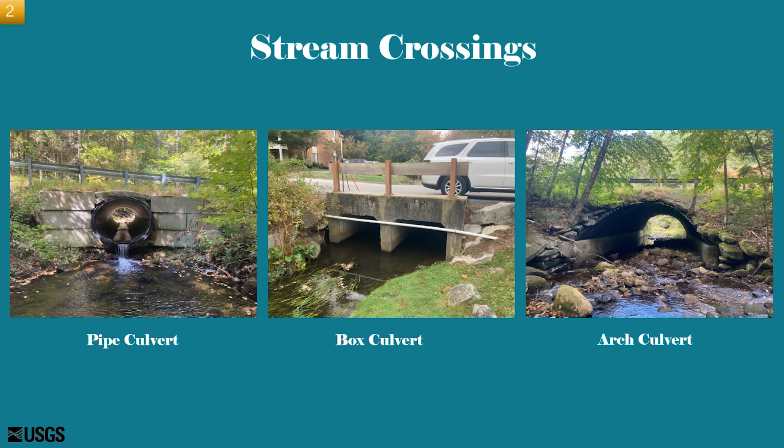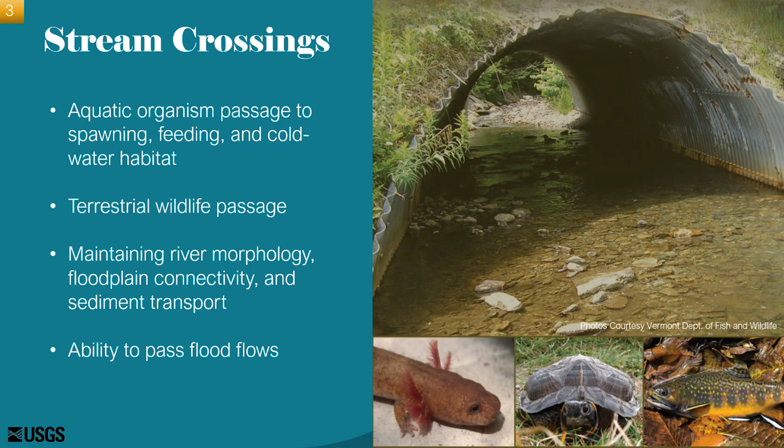So Massachusetts, as well as other states, are developing standards for stream crossings because they're essential for maintaining aquatic connectivity for vulnerable species of fish and terrestrial wildlife, and maintaining the natural water course and stream bed, and designing structures that meet minimum hydraulic standards that have more capacity to pass normal flow and flood flow conditions are essential for flood resiliency. There is also consideration to account for future flood flow conditions due to climate change as well.

So a little bit of background here. There are a lot of stream crossings in Massachusetts, as you can imagine, in most states. But in Massachusetts, there's over 25,000 stream crossings, and many do not pass the 10% annual exceedance probability flood flow, or the 10-year recurrence interval flood flow. And many don't pass standards for aquatic organism passages.

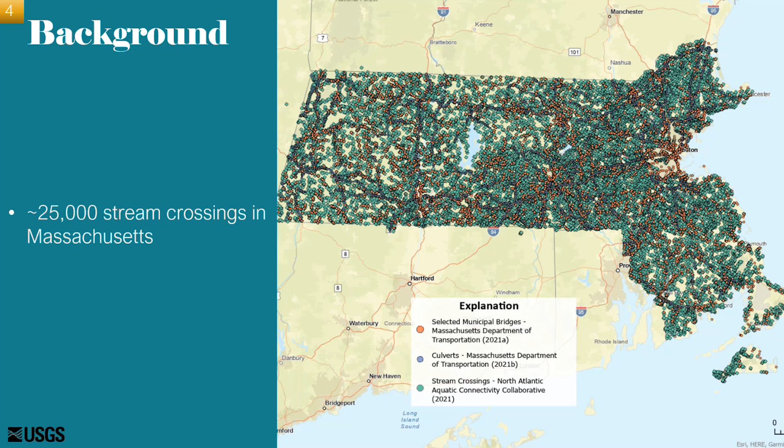So the state agencies and municipalities are looking for a tool to help standardize and prioritize a more comprehensive planning process for culvert replacement projects to increase flood resiliency and aquatic organism passages by adhering to these state regulations throughout the state.

So, as was said, many of these culverts are undersized, which often results in stream bed scour that can significantly lower the stream bed downstream of the culvert, creating a drop or a perch from the culvert outlet to the water below. And native fish can only jump about 1 foot or so. So culverts that are perched more than 1 foot become barriers to these fish migrating upstream.

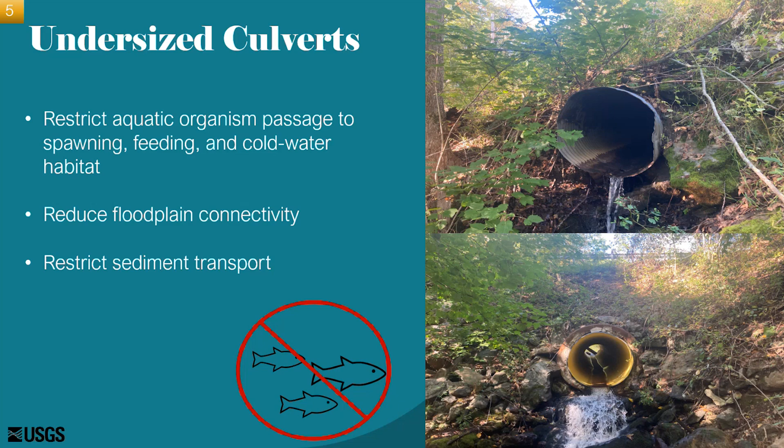These problems are becoming more and more prevalent due to heavier rainfall events, as we have seen throughout the nation, especially in our neck of the woods here in New England. We've had some pretty big storm events that have just blown out culverts and roads all over the place.

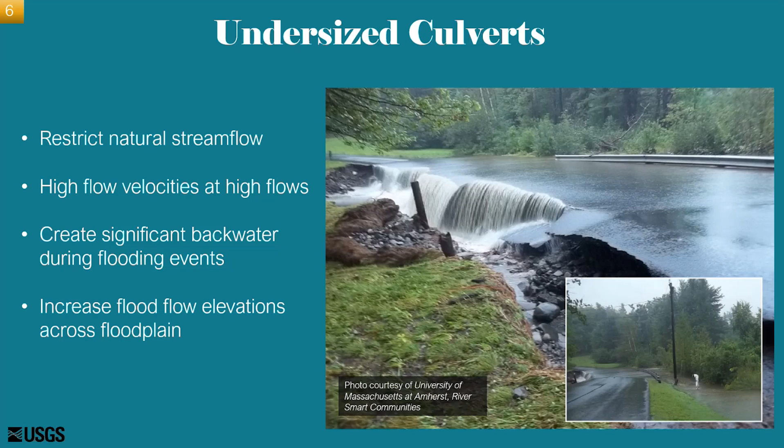Let's see. Oops. Sorry.

This is just another image showing a massive blowout of a culvert structure that was undersized in Massachusetts in just the recent years here. So in 2012, Massachusetts Department of Fish and Game published a Massachusetts Stream Crossing Standards Handbook that provided a set of guidelines for how new or replacement culvert crossings should be constructed.

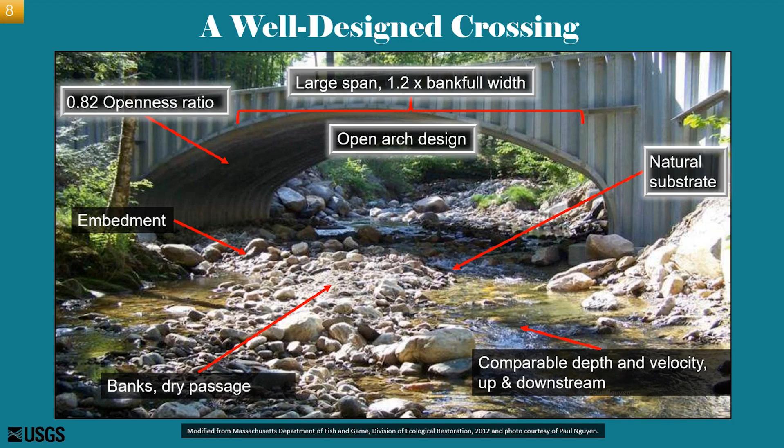And for our study, the culvert designs meet the following stream crossing standards that are highlighted here. No, it looks like my little animation's not going to play. That's okay. It's the top one there: a minimum span of 1.2 times the bank full width, a minimum openness ratio of 0.82. That's the culvert cross-sectional area divided by the culvert length. And it also adheres to the natural substrate for a stream channel bottom in the culvert. This is done by using the three-sided box, arch culvert, and embedded pipe designs.

So Massachusetts DOT maintains about 6,400 or so of these structures throughout the state, which then means there are over 18,000 structures that are maintained by municipalities and private owners. And these municipalities often lack that technical expertise and resources to assess and design new structures that comply with these stream crossing standards. And they'll typically replace structures that have failed with the same structure design. This is a practice that's called in-kind replacement, and it's something that the state agencies are taking steps to avoid.

But realizing that budget is often the major limiting factor, the state agencies have developed what's called a maximum extent practicable, or MEP, design criteria range that all proposed culvert projects must meet.

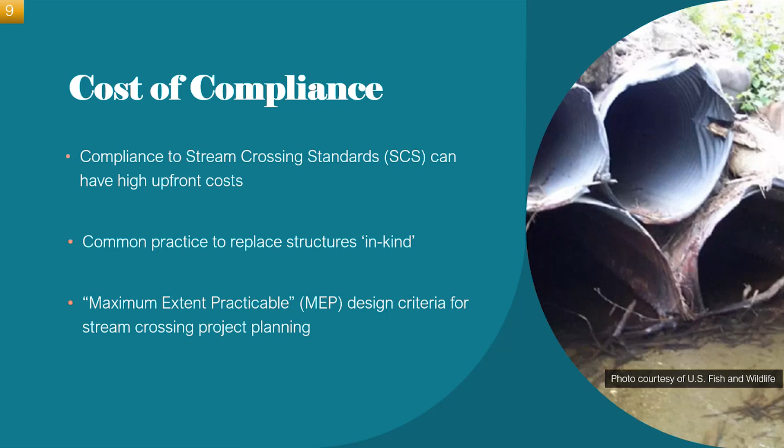Are you all seeing the animation play at all? Like, I'm not seeing it on my end, but are you just seeing like a trigger event? That's it? I think we're just seeing the trigger event. Okay, I'm not sure how to make it play. Sorry about that. Oh, maybe it goes. Yep, okay. I'm seeing it now. Oh, technology.

Okay. So an event gets triggered or triggers something that requires a culvert replacement. And there's typically little or no planning that's involved here for minimal design analysis. And they'll typically just put in another of the same type of culvert that just will cause another problem later on down the road.

So the proposed idea is that to remediate this, the state is having a hydraulic stream crossing model tool that can provide culvert design options that meet the minimum hydraulic design flow requirements, but also provide some design options that are compliant with Massachusetts stream crossing standards. So during early phases of this, there can be some more planning involved, as well as applying for grants that could help with the budgeting side of things.

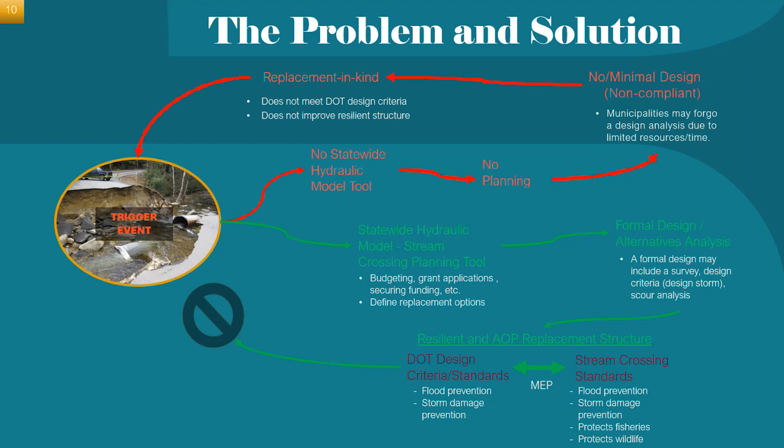And then there would be an official design analysis that should be conducted to ensure the replacement culverts meet the certain flood resiliency and ecological restoration standards.

So this is kind of a basic graphic just depicting that MEP, or maximum extent practicable criteria range. Any project that doesn't incorporate the baseline hydraulic design is unacceptable for culvert replacement projects. And any plan that at minimum includes the baseline design and or elements of the Massachusetts Stream Crossing Standard to the MEP criteria is within the acceptable project range.

That baseline standard for hydraulic design is based off from the Massachusetts DOT hydraulic design flows for various functional road classifications. For example, the hydraulic design flow for most of the rural and urban roads is 10 to 4% annual exceedance probability, or the 10-year to 25-year recurrence interval flood flow. And the hydraulic design flow for high traffic road classifications, such as interstates and highways, is typically 1% AEP, or the 100-year flow event.

And there are various ecological factors that should be considered when planning for culvert replacement projects, such as stream habitat qualities, wild scenic river, cold water fisheries, etc. The stream connectivity restoration potential. So UMass Amherst and MassDEP have been developing a rating system to quantify the ecological impact for given stream crossings based on those factors.

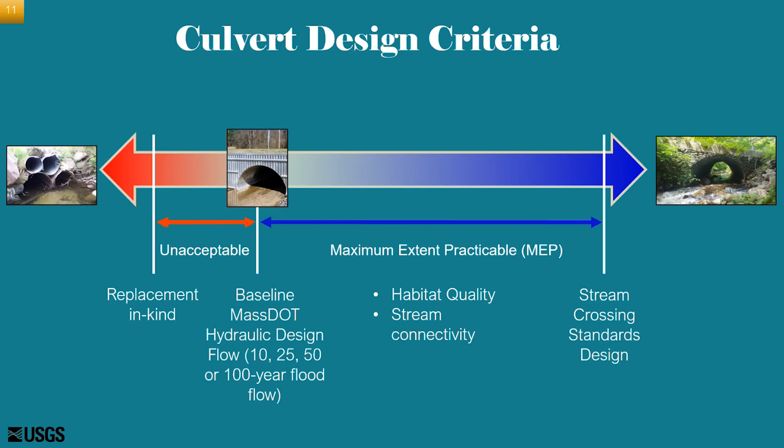And the ecological rating is based off these various categories seen here on the stream connectivity restoration potential. The higher the score for a given stream crossing, the more important the stream crossing standards should be met for a specific culvert replacement. The images on the bottom of the screen show the basic concept of how stream crossings can impact habitat quality. The image on the left shows brook trout colonies in purple, which allow them to freely move throughout the stream network.

The image in the center shows the introduction of road crossings that do not allow for proper aquatic passage, which effectively isolates portions of the stream network and decreases fish populations and hinders migration. The third picture shows culverts that have been replaced according to the stream crossing standards, opening these critical linkages for aquatic passage, and the brook trout can migrate freely between the stream network.

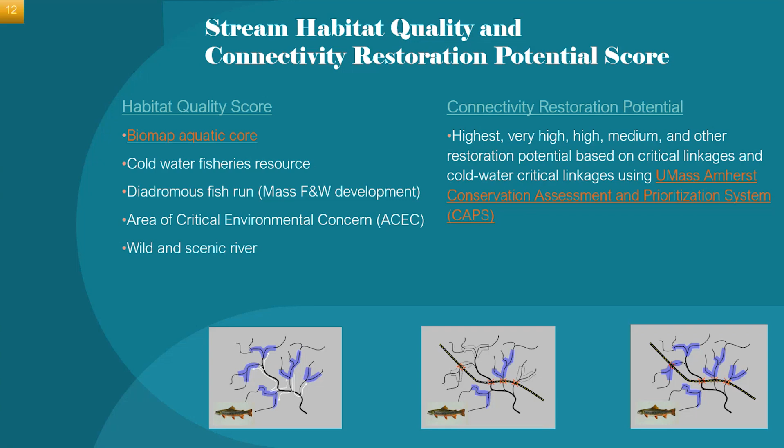So in 2019, state agencies convened a Massachusetts Culverts and Small Bridges Working Group that recommended the development of innovative tools and modeling to assist in simplifying and expediting culvert and bridge sizing to help provide improved flood resiliency and aquatic organism passage, stream continuity, and river and floodplain processes.

The USGS then began the first phase of this study by investigating the feasibility of developing this statewide hydraulic modeling tool. And we published a geonarrative that presents the conceptual ideas and components of the proposed web-based application that would enable these municipalities and engineers to view preliminary culvert designs for both new and replacement stream crossing projects in Massachusetts.

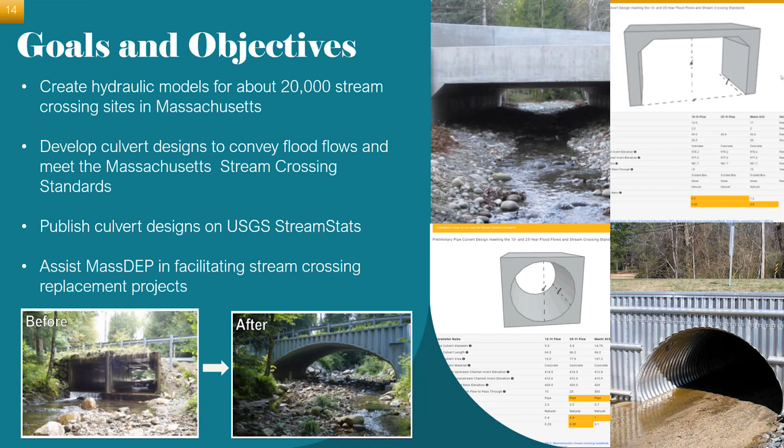So in phase 2, we had USGS field crews survey 46 sites throughout Massachusetts in various terrain settings and watersheds that select North Atlantic Aquatic Connectivity Collaborative. That's a mouthful, but it's what we call the NAACC. And if you haven't heard of the NAACC, I highly recommend checking it out. The NAACC and SARP, Southeast Aquatic Restoration Project, or something like that. It's a stream continuity project.

Fantastic database of culvert and stream crossing locations throughout New England and beyond, I believe, that have a bunch of assessments that are done on these stream crossings and have pictures of the locations and different measurements that are taken. It's a fantastic database. Anyway, we had some hydraulic modelers use the field data to develop detailed models of preliminary box, arch, and pipe culvert designs that convey the 10 and 4% AEP flood flows and meet the stream crossing standards.

And then we had our GIS team develop automated tools to derive model input data from LiDAR digital elevation models to simulate the field data. The automated GIS input data are then formatted to be ingested into HEC-RAS software.

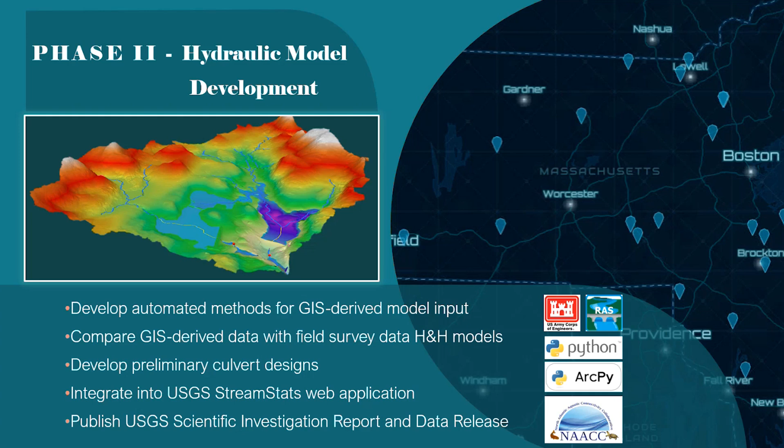Both the field survey and the automated GIS hydraulic models consist of 4 stream cross sections. The upstream approach, seen here as number 1, is the cross section that's placed along the stream channel where natural flow conditions occur upstream. The upstream face cross section is placed at the culvert inlet where flow is restricted into the culvert structure on

the upstream end. The downstream face cross section is number 3, and it's placed at the culvert outlet on the downstream end. And then we have a downstream exit cross section that's placed where natural flow conditions return.

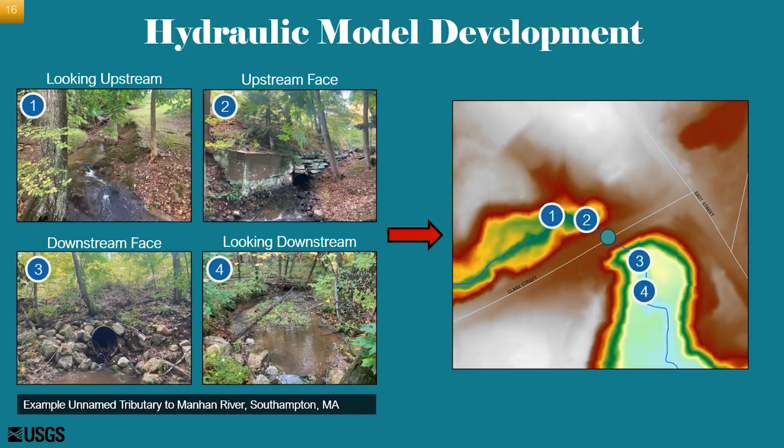We currently don't have a consistent and systematic way to detect normal flow conditions for placing the approach and exit cross sections purely from digital LiDAR data. So our method places these cross sections 2 bankfull widths upstream and downstream from the culvert face cross sections, respectively, for the time being.

The upstream face and downstream face cross section placements are determined by passing the smoothed Z and M values from LiDAR-derived stream center lines. So that's the elevation Z values and the station M values of a LiDAR-derived center line that gets passed through an extrema algorithm. And this algorithm detects the closest inflection points on either side of the road deck location.

The downstream face cross section can often be challenging to locate. So a slope test was performed to ensure that the nearest point to the road embankment on the downstream side has an elevation that's less than or equal to the upstream face inflection. I should say, it's less than or equal to because of the nature of LiDAR, especially in flat wetland areas. So it can be kind of problematic with the interpolation.

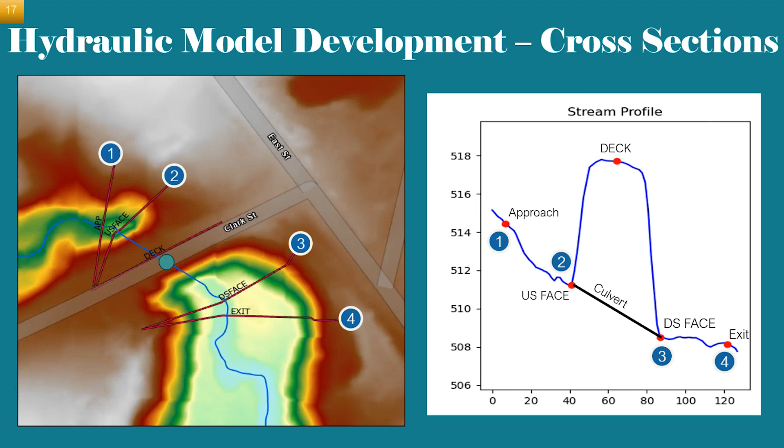And we're currently using regression equations developed to estimate bankfull channel geometry, as I said earlier, to compute the bankfull width and depth. In most cases, the interpolated elevations capture the water surface elevation height during LiDAR collections.

And there can also be interpolation artifacts where banks are really steep and channels are narrow, causing artificially higher elevations in the DEM. And for that reason, our cross-section elevations use estimated depths to simulate trapezoidal channel geometry, effectively lowering the elevations between the bank points on the cross-sections.

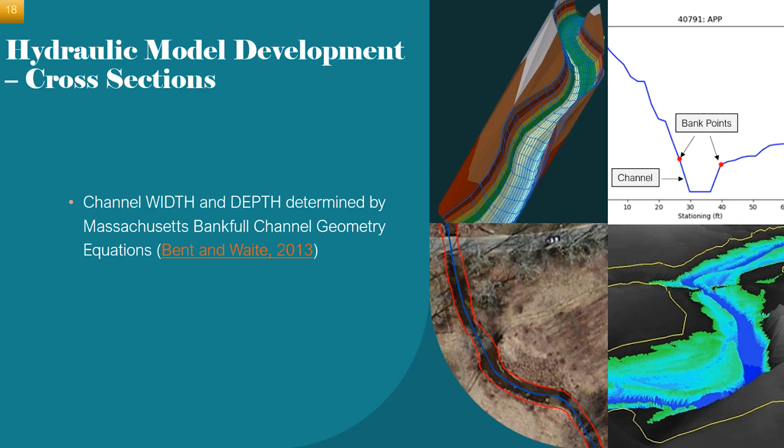Massachusetts peak flow regression equations are also used to estimate the flood flows based on the drainage area, which is LiDAR derived, percent storage, and rainfall frequency within LiDAR-derived watershed boundaries for every stream crossing location.

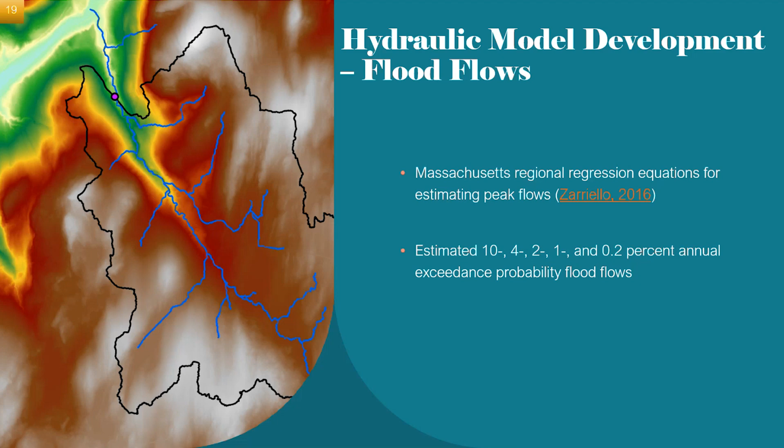Our coding team has developed automated routines to ingest geospatial data to generate HEC-RAS input files. These scripts will iteratively generate and run hydraulic model designs through HEC-RAS software to determine the optimal preliminary culvert design.

That passes the Massachusetts DOT baseline flood flows and box and arch designs that pass the standards for, as I mentioned before, 0.82 openness ratio and 1.2 times the bankfull for the span.

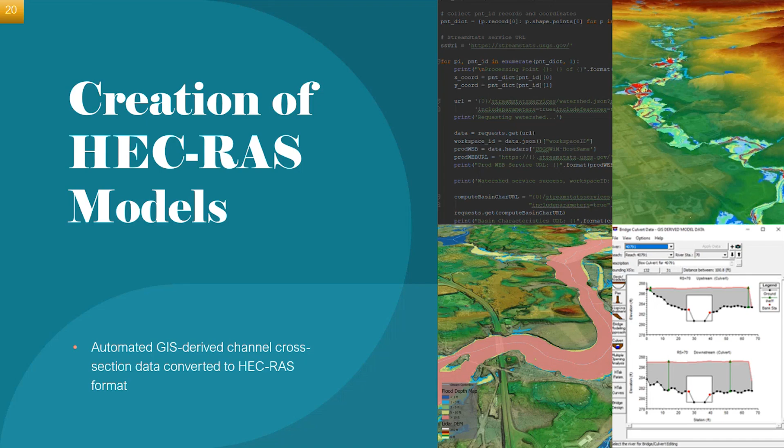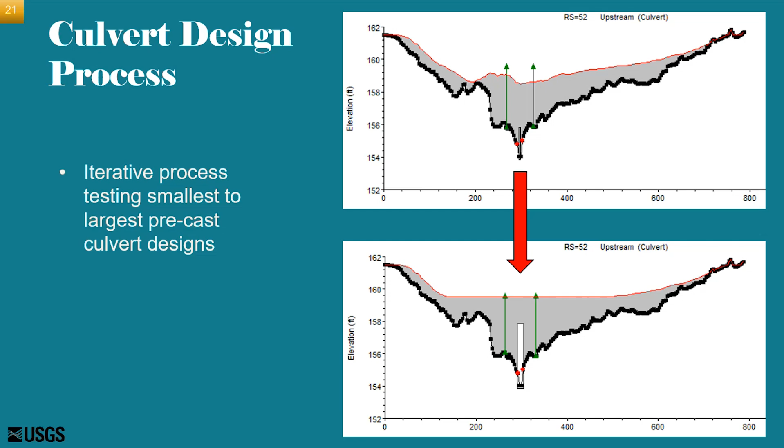The HEC-RAS controller is used to automate the model runs using dimensions of precast culvert structures through an iterative process, starting at the smallest precast culvert design and incrementing by half-foot intervals for the span and rise throughout the process. The next few slides will show images depicting this iterative HEC-RAS modeling process.

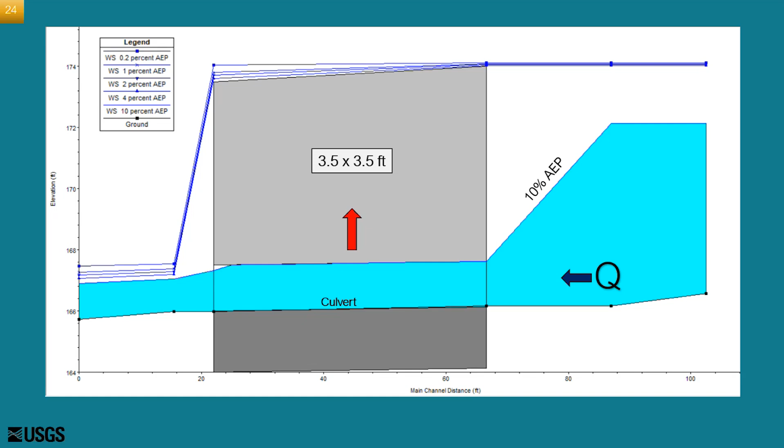Here we see the 10% AEP can pass through the culvert, but with significant backwater, and all the other profiles will still overtop. So it continues to iterate, increasing the dimensions.

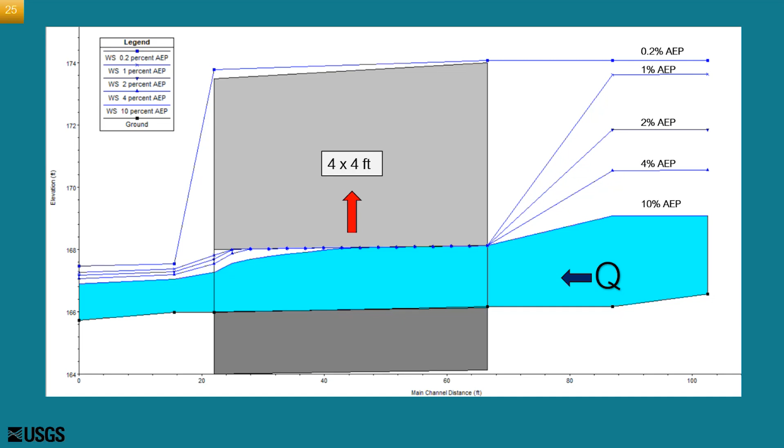It'll continue until it sees the 10 and 4% AEP, or the 10 and 25-year flood flow event, pass through the culvert with headspace. So there's very little to no backwater involved. And that would be the baseline minimum requirement for the maximum extent practicable.

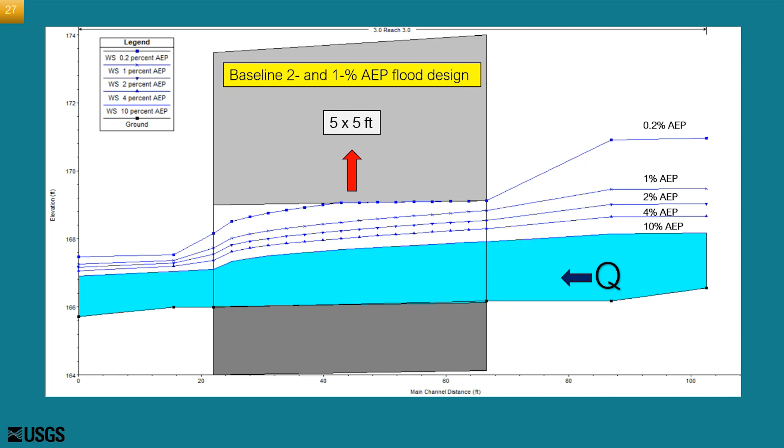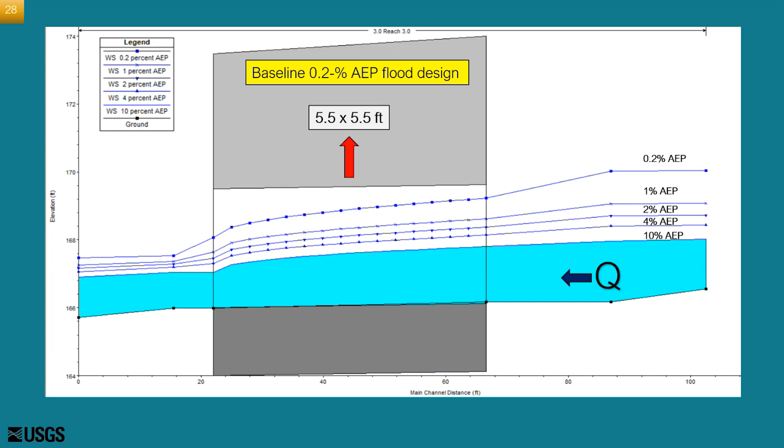But then it continues on until the 2 and 1% AEP, which is the 50 and 100-year flood flow, passes through with headspace and very little backwater. And it also continues on to make sure all the flood profiles will pass through. The final design from the program continues to iterate through the culvert dimensions to determine the optimal design that passes the stream crossing standards as well, as far as the dimensions and passing all of the flood profiles through.

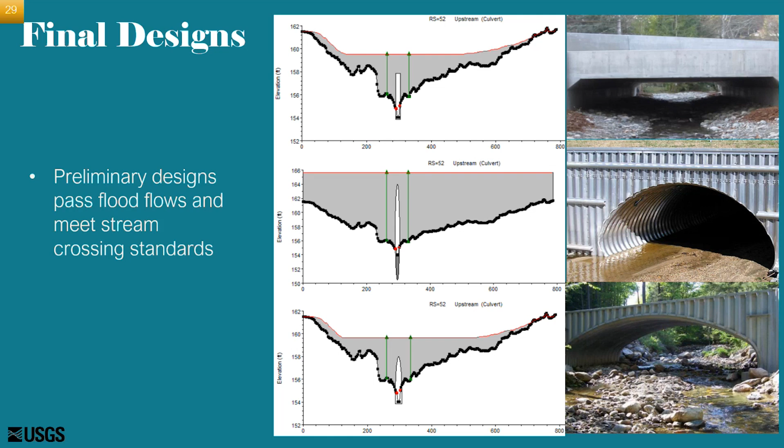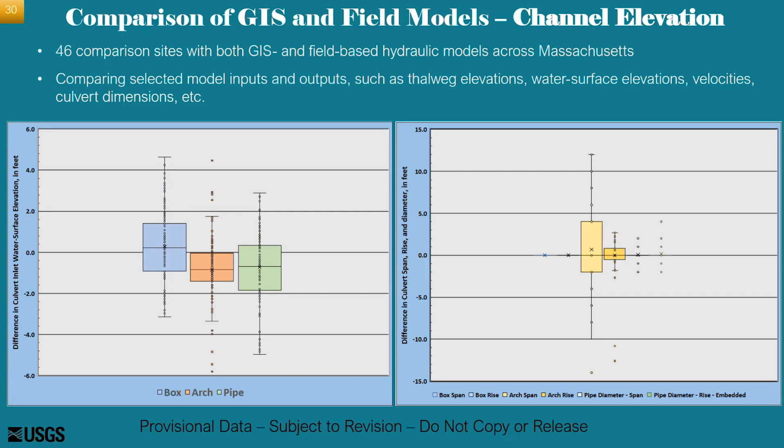So we're seeing some differences, more major differences at the downstream end, the culvert face of the downstream end. And I think that's due to an elevation issue where often there's a steep embankment and the cross section just gets placed at the nearest location that has a slope from the upstream end, which might not be the right location if you're surveying or actually looking at the structure. So that placement is often problematic and could be causing a lot of the outliers that we're seeing.

We now have select sites from phase 2 published in a data release and available in the USGS StreamStats web application for Massachusetts. The remaining sites, as I said, are going to be available very soon. Right now they're on a test server for us to test out, but they'll be on the public facing application shortly.

On StreamStats, users have the ability to view and select available stream crossings to generate a downloadable report that includes the preliminary culvert design options for the box, arch, and pipe culvert structures that meet the MEP requirements. And the report also includes habitat quality information and scores that are pertinent to the stream crossing standards, and also includes drainage basin characteristics.

You can also download the drainage basin and hydraulic model files right from StreamStats, which is a really nice option. So if people wanted to, they could take and use that preliminary culvert design and tweak it as they see fit.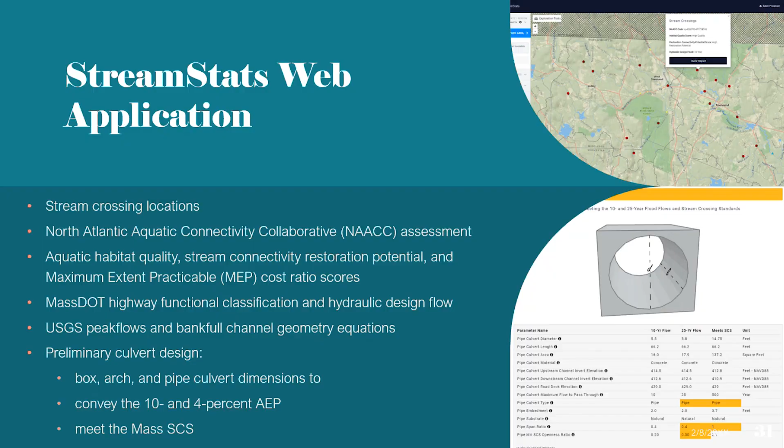So now that we have established an automated approach to building these hydraulic models at stream crossing locations, we're moving on into a more production mode phase. We'll be publishing the data releases in SIR for phase 2 development while we're continuing to run the process on a larger scale and reviewing those results and tweaking the automated process as needed.

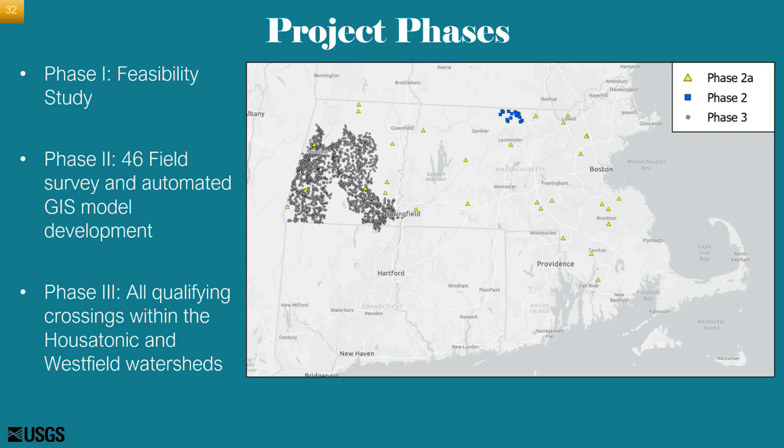As we expand this out, we're sure to run into more problems, just the nature of digital data and automated stuff. And we'll continue to process select sites throughout Massachusetts and host the preliminary hydraulic designs and data on StreamStats through a web map service. And that is all I had.